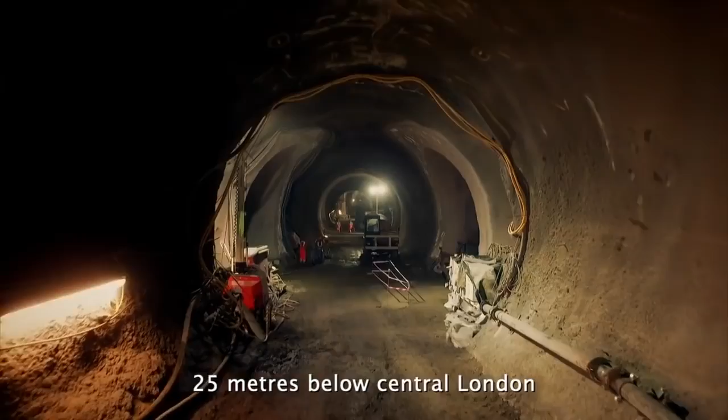This is a mole's eye view of an extraordinary endeavor, almost entirely hidden from sight. While shoppers and city workers pound London's pavements above ground, this secret army of more than 10,000 workers is pulverizing the rock and clay right beneath their feet. They're building Crossrail, a brand new underground railway costing almost £15 billion. It's one of the most ambitious rail projects in Britain since the time of Brunel.

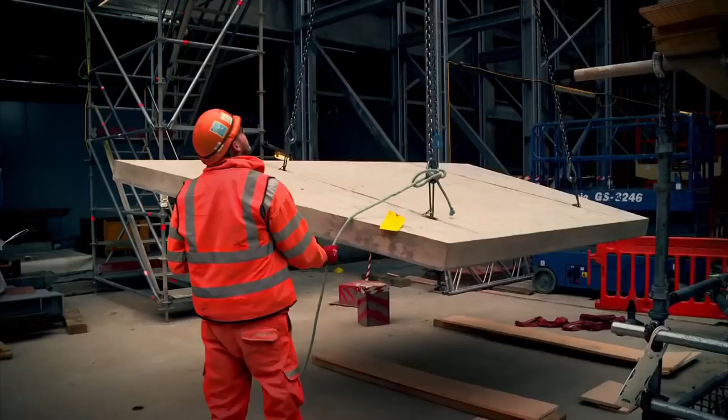You ready? I don't think we've seen anything to the scale and complexity of Crossrail before, certainly not in my lifetime. In the last series, we followed engineers burrowing the maze of subterranean tunnels for the trains to pass through. Inch up nice and easy. You know what? This is real. It's coming. We've been working night and day. And now for the second part of Crossrail. Give us a shout if that's going to touch that handrail. Now we follow workers as they embark on the crucial final phase.

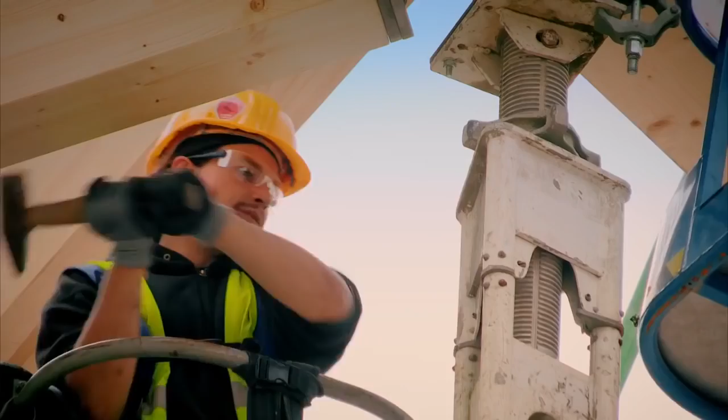Oh, stop there. Engineers face the huge challenge of constructing the tracks, trains, platforms, two notches up again, and stations. Down a little bit so you face me. It's a constant battle to avoid snarling up the streets. This is one of the busiest roads in London. You've got thousands of pedestrians walking past us. Pressure's on. Or causing them to cave in. The wall hasn't collapsed then yet, no? Great big mega project all across London. Every station is feeling the pressure and is feeling the heat.

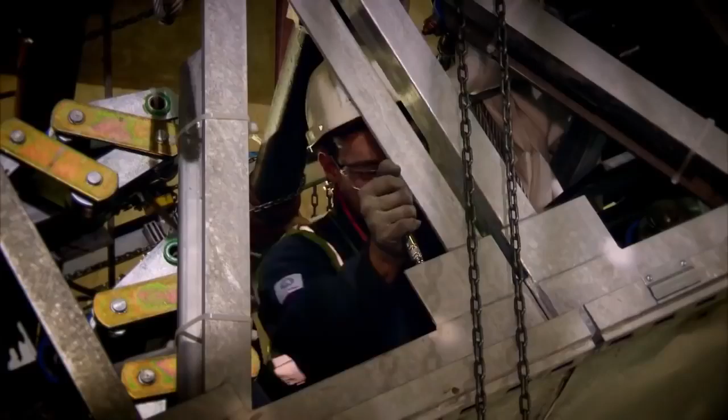For the last 3 years, cameras have been following crews as they struggle to finish construction, so that the first train can depart on time. Tight. They're coming that way, yeah? We've got to be here before 6. Before we open, there's a lot to finish. All our reputations are at stake. We got to get the track in, we got to get the platform, and then we got to get out of the way because the trains are coming through. This is the exclusive inside story of the race to complete London's new underground railway.

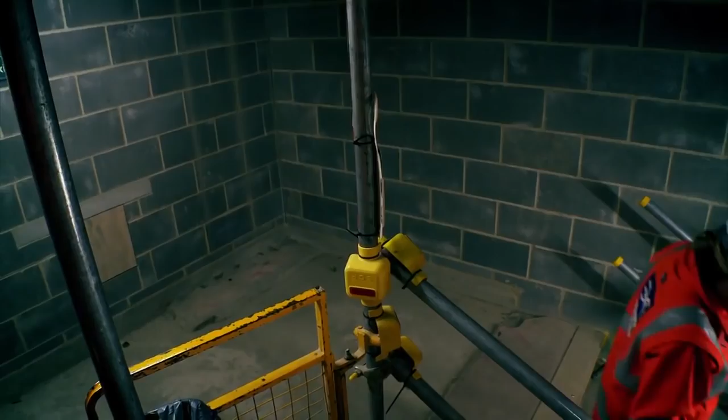5 a.m. Farringdon, the heart of London and a historic hub for trade in the capital. As merchants at Smithfield Market set up their stalls... All right, ready to go. Down, down, down. It's not the 8 levels going down, it's the coming back up. Crossrail project manager Linda Miller is descending 30 meters down into the bowels of the earth. Fantastic. All right, so we're not too far to go. We've got about half an hour.

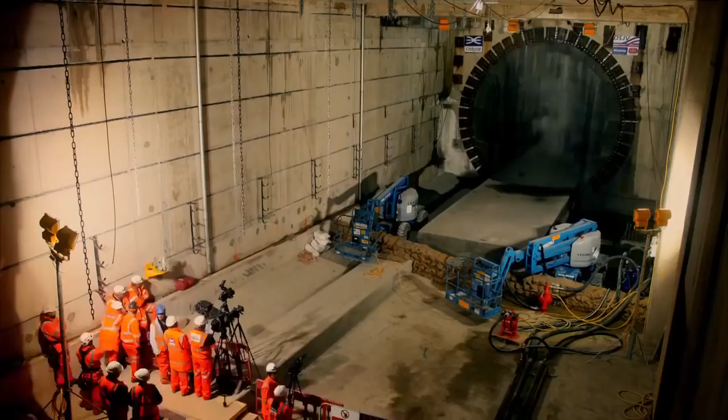Linda is joining workers to witness a critical milestone on the Crossrail project, the 18th and final tunneling breakthrough. This marks a key moment. For the last 3 years, 8 giant drilling machines like this have been excavating the earth to create the tunnels that Crossrail's trains will run through. So there you are, you can see Whitechapel. This final slab of concrete is all that stands in the way of the tunnels connecting up, so they run unimpeded from the east to the west. Yeah, okay. It also marks the start of a new phase in this trailblazing project.

Over the last 3 years, it has not been an easy dance by any stretch of the imagination. This is an incredibly, incredibly important moment in time. But this is also for us the starting gun of turning these great big cavernous concrete spaces into functioning, beautiful transportation systems for the next 120 years. All eyes and ears are on it coming through at the moment, and it's a moment of tension, it's a moment of anticipation. Oh!

With one final push, tunneling on Crossrail is complete. Congratulations. Congratulations. That's fantastic. Welcome to Farringdon. For every millimeter of this, I have been with it. I got the story for each one of them. I'm not exaggerating this, by the way, I'm romantic about it. Fantastic night. Tonight's a night to be celebrated. It's a hard-fought success.

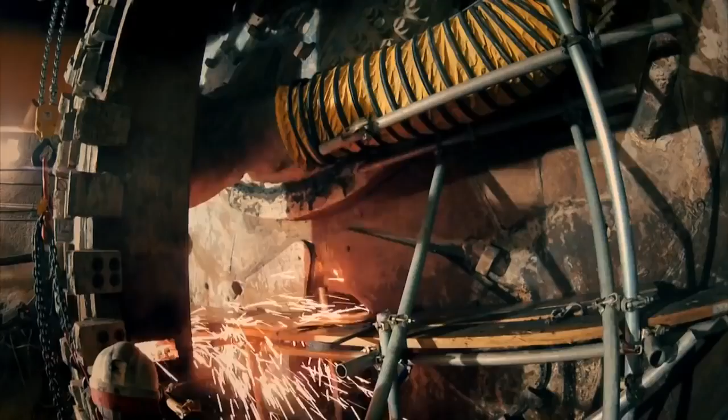As workers carefully dismantle this last tunneling machine, a critical new chapter in this ambitious scheme kicks off. Crossrail is a story of huge, huge moments and giant accomplishments. I've got 100 great big things I got to worry about every day. And going forward in the future, I have 1 million little things to worry about every day. Now it's a race to the finish line.

Crossrail is a brand new east-west railway being built directly below the heart of London. This new line is designed to ease the strain on the existing 150-year-old London Underground network that today struggles to cope with peak demand. Crossrail is a huge new railway for London, so it's going to be able to carry 200 million passengers a year, a 10% increase in capacity. At a stroke, Crossrail will help to keep London moving for the next many, many years.

The new line will run overground from Reading and Heathrow in the west, straight underneath central London. It will plug directly into key mainline train stations, connecting the bustling West End to the historic Square Mile and the thriving East End, before terminating at Abbey Wood and Shenfield in Essex.

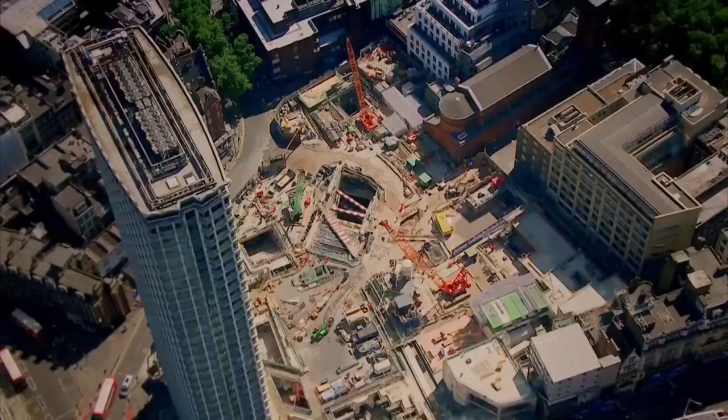120 kilometres of new railway will link to the rest of the tube. Heathrow Airport will be just 26 minutes from London's main shopping district, Oxford Street, a journey that currently takes almost an hour on the tube. It's one of the biggest engineering projects in Europe.

A big construction project is a little bit like an orchestra. You've got many players, lots of skills, different skills, and they've all got to be playing to the same tune. The complexity that goes along with scale is, of course, intense. Railways are very difficult things to design and build.

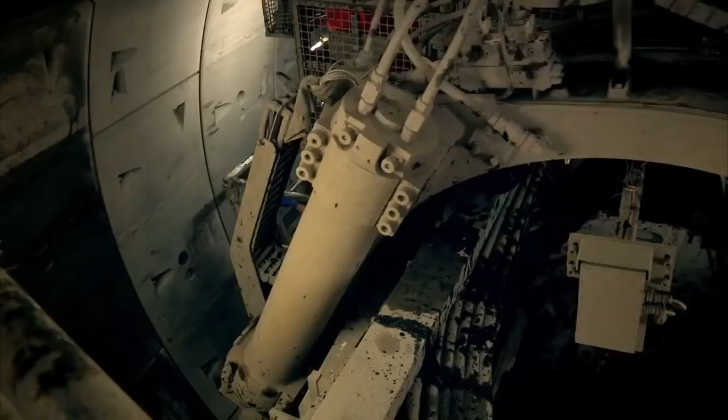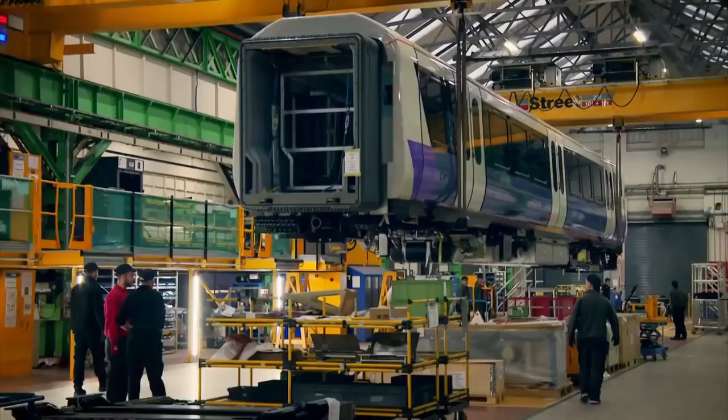Construction work on Crossrail began in 2009. The first major challenge facing engineers was to dig out 42 kilometres of train tunnels underneath central London. Now, with tunnelling complete, they face the Herculean feat of fitting out the platforms, laying the tracks, building a fleet of new trains, and constructing 10 cavernous new stations in central London. And hold it there, stop. With the first train scheduled to run in less than 3 years, the clock is ticking.

The biggest station that needs building along the line will be at Farringdon. Farringdon is home to Smithfield Market, the largest meat market in the country, and the city's world-famous diamond crafting quarter, Hatton Garden. Once complete, Farringdon will become one of Britain's busiest train stations, servicing 150,000 passengers a day.

Thank you. Oh, there you are. Every day I bounce out of bed ready to come here and come to work, feeling great about it. Linda Miller faces the mammoth task of making sure its gates open on time. This station is really going to be where the action starts when the railway opens. If you were to take the Shard, which is the tallest skyscraper in Europe right now, and lay it on its side, it would fit inside of my Farringdon station.

We're enormous in scale. Our platforms are over 300 meters long. What that means in the future, if you're stepping off the trains at Farringdon, you need to know which way you're going, because if you walk in the wrong direction, you're going to be half a kilometer from where you wished you were.

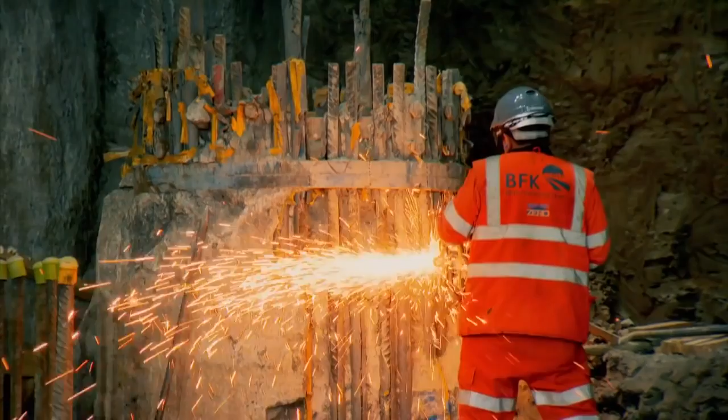Looks great. Afternoon, guys. We get every day that we're spending the taxpayers' money, and we care about that because we're part of those people paying for this. Linda's team's first task is to dig out 2 huge 8-story deep holes. These will form the ticket halls for Farringdon Station. Underground, they must widen the freshly dug tunnels to create its platforms, then dig out passageways and escalator shafts to link them to the ticket halls and entrances.

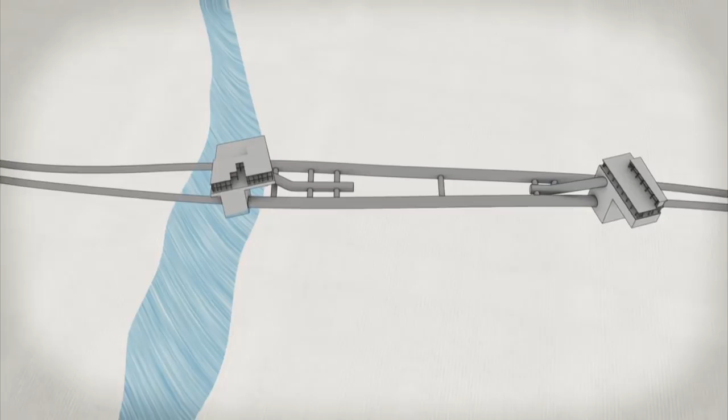Excavating the earth to build the platforms could be treacherous. Geological fault lines run right across the site, and an ancient river once flowed through here, leaving the earth pitted with unstable pockets of sand and water. If the team hit these areas as they dig, the earth could cave in around them, so they must be on guard. While workers above ground dig out the huge holes in which they will build the station's ticket halls, 30 meters beneath the site, the sandy earth is making excavating the train platforms tough going.

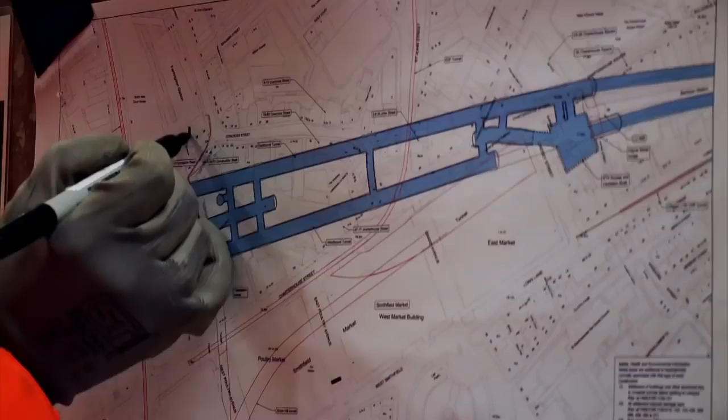So this is what we've got. Here's a bird's eye view looking down on the station. We're facing the most dangerous type of soil. There's not 1, but 3 different fault lines right through the middle of our work. Fault lines present a danger to the long-term durability of the railroad itself. The soil changes, slips, quite literally, 3 to 5 meters. It provides a pathway where you could have cracks, where you could have future flooding.

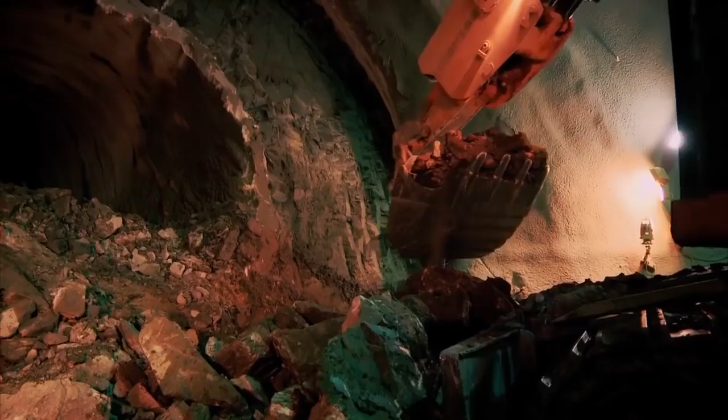The mining is going well, but we're never complacent. We never say, oh yeah, we're all that good, because that's the day it goes wrong.

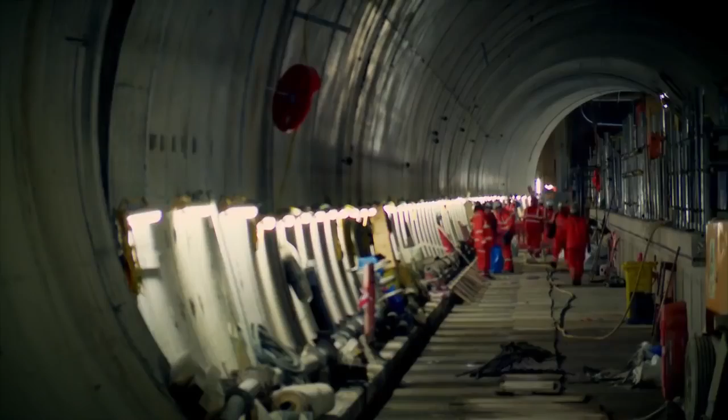Once dry, they line the platform walls with a plastic membrane. The membrane is fully waterproof, tough, durable, and it's going to form a seal around our entire tunnel. We are going to be wrapped like a Christmas present. It takes 5.5 football pitches worth of the membrane to protect the platform and escalator passages that lead up to the ticket halls.

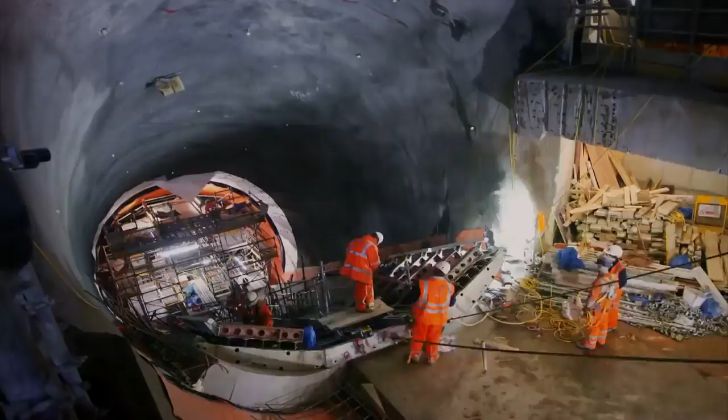See, doesn't that look so astonishing? For a while, it's going to be Orange World around here.

Two stops east lies the vibrant community of Whitechapel, home to the foundry that cast the Big Ben bell, and famous for its bustling market, which has been the heart of the community for more than 300 years. One of Crossrail's 10 central London stations will sit in this district.

The station here won't be completely new. Instead, engineers are undertaking a £111 million overhaul of Whitechapel's existing tube station, built in 1876. Their aim is to create a modern, open-plan station to plug Crossrail trains directly into the existing tube and overground services that stop here.

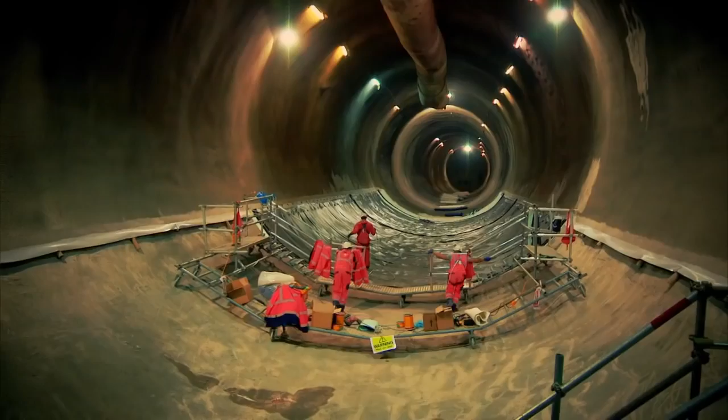While workers complete Whitechapel's train platforms below ground, (Got that out, mate.) proud Yorkshireman Jim Forrest leads the team gearing up to build the new station above. It will be one of Jim's toughest jobs in a career of trailblazing projects.

I've worked in construction since 1960. I've worked on the Humber Bridge, I worked on 1,000-foot concrete chimneys, nuclear power stations, coal power stations, you name it. But this is the highlight, what I'm doing now. I did retire in 2003 for a fortnight and then came back. When I realised it wasn't a holiday I was on, I thought, well, I'd better look for something to do. Depends what comes up, but it would be a good project for a swan song, really.

Whitechapel is one of the most confined and most complex construction sites along the entire Crossrail line. Market stalls, roads, and residential buildings hem the site in. Whitechapel is one of the most logistically complex projects I've ever worked on. We've got very little space to work above and around a live station. We've got schools and public and sports centres.

I think the station layout is not very good for modern day. The passenger flow is very poor. There's no step-free access, and it looks as though it's just been thrown together. What we've got now is not fit for purpose, so we've got to change it. The layout of the existing Whitechapel station is so haphazard that it's the only place where London Underground tube trains pass right over the mainline overground trains.

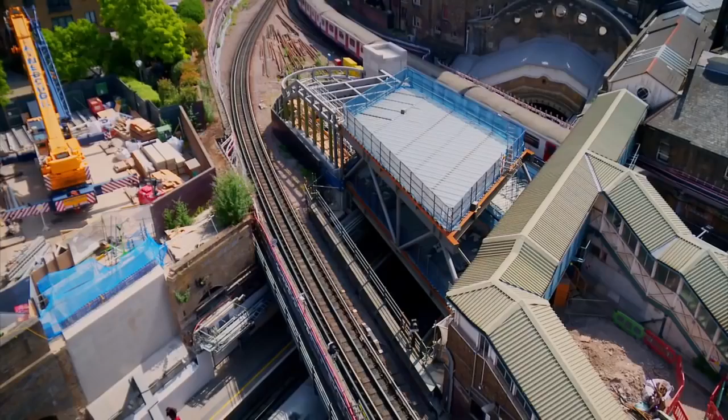Squeezing a conventional station into such a chaotic space is impossible. So engineers must build the new ticket hall inside a unique 180-metre-long floating bridge that passes right over the site. This station bridge will run north to south, connecting down to the Crossrail tunnels, channeling passengers to existing train lines.

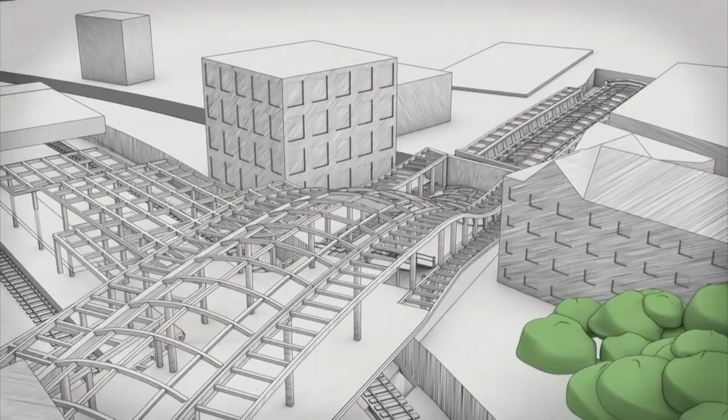A skeleton of 6,500 pieces of steel will form its frame. This will allow the station bridge to hang from the surrounding Victorian infrastructure, giving the impression that it floats above Whitechapel. 352 panes of glass will allow light to stream through the structure. Special aluminium roof cladding will absorb train noise, while carbon-cleaning sedum plants will top out the elevated concourse, giving this 19th century station a 21st century makeover.

If I was given a choice, I would maybe say yes, we should flatten this and build a nice one, but then it wouldn't fit, it'd be like a carbuncle in amongst the rest of it. So you've got to be respectful of what other people want. Keeping the existing station operational while they build the new one above it makes this project even more difficult for Jim and unpopular with commuters.

Whitechapel is open, but this particular entrance is going to be out of service until about 2018 while it's being refurbished, Crossrail's being introduced. You've got to go about half a mile to get from the platform to the hospital, which is not very good if you're late. There is now a new pedestrian crossing right opposite the exit to the station though, so you just carry on. It's the same distance.

No, I've been hit by the station closure this morning. Had to go from one station to another and didn't really know my way there. There's always work going on, and it's not just here, but it's all over London.

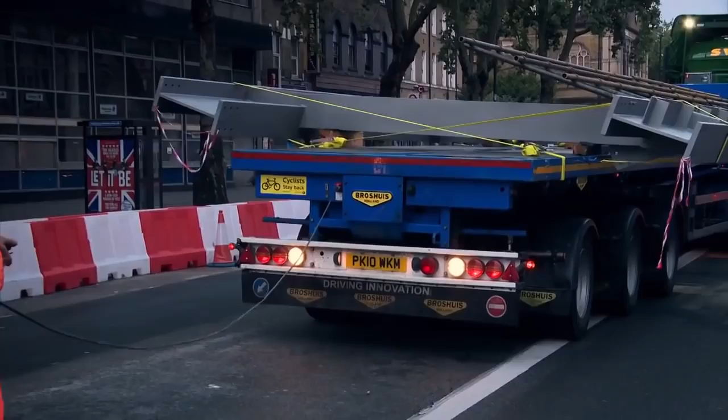There's traffic marshals going down to block the traffic down that end. We've also got traffic marshals down that end to stop the traffic there. These lads are controlling the rear axle steering, so it helps them get around a very tight radius. You can see how much there is, at least a metre hanging over either side.

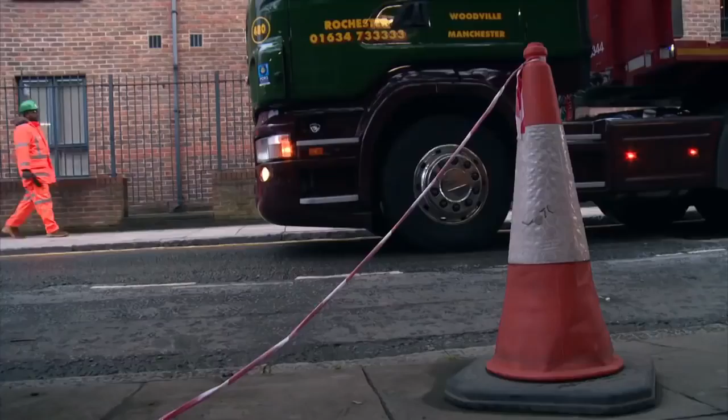Here we don't have a lot of clearance on the street furniture. The loads look big. The shape of them makes life difficult for them. Here we are. The road is now open, and it's open with 7 minutes to spare. Now we need to take this down to the crane to allow the other 3 lorries to drop back to make sure that the front lorry isn't blocking the pedestrian way when the market opens.

With 6,500 pieces of steel to guide in and assemble over the next few months, Jim's team has their work cut out. Another one bites the dust, eh? Yeah.

The markets here are at the heart of community life. But some traders have been forced to move their pitch while Whitechapel Station is rebuilt. My shop was in front of that station, so customers basically used to come in the street, but now it's a little bit further. But it's only for 2 years, so after 2 years more customers will come because of the Crossrail and other stuff, so it should be better.

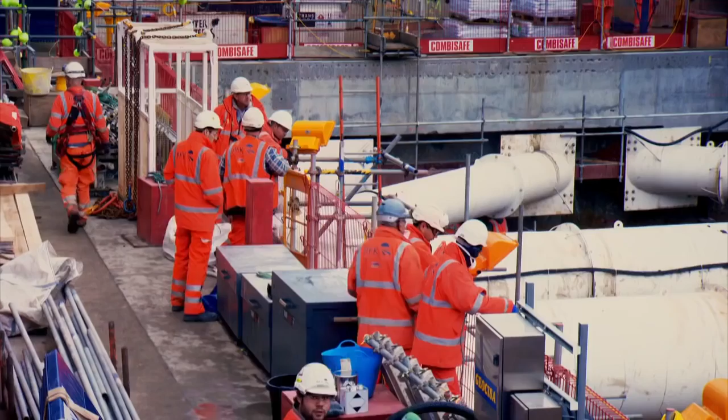Two stops west, Linda's 500-strong team has run into problems building the new station at Farringdon. The track teams, they're like a juggernaut, so we got to get out of the way. This is one of the busiest sites in the entire project, and in fact, the busiest I've ever been on in my career. But there's a new problem to solve, and this is a really tough one.

The team has dug out the 8-storey deep holes that will form the ticket halls for the station, and are now building its walls and floors. We had 3 pieces arrive on site on Friday that we couldn't get in over the weekend. That is going to be the hardest of them all. Underground, there's a battle for space. As the walls of the platforms close in, it's become almost impossible to shuttle crucial materials and equipment down to this crammed subterranean site. This jam could hold up the track-laying team that is fast approaching this stop.

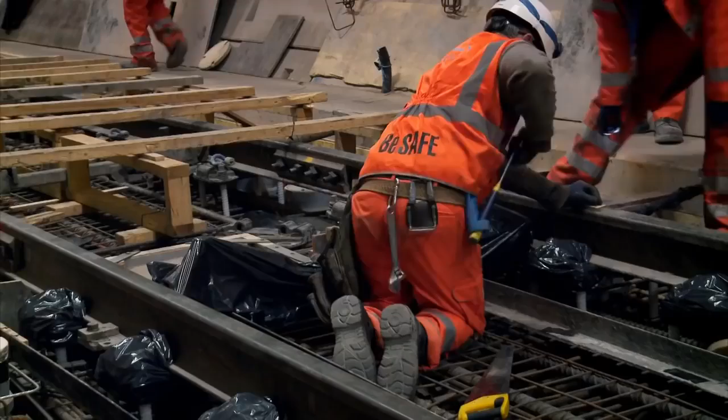Right on the tail of our tunnelling operations, the track laying has begun out in East London and is heading towards us. So the track layers need safe, clear access from street level down into the tunnels that is not through the stations. We lower the unit down into these first 2 beams, and then you just remove the jack. One thing about being an engineer, especially in the construction industry, is you're always having to think on your feet.

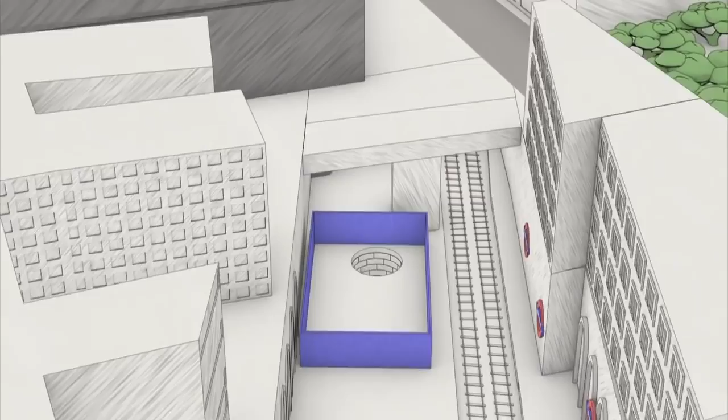To get equipment down underground faster, Linda's team hatches a plan to dig out an emergency 30-metre deep vertical shaft. This will plug into the tunnels below to give workers direct access. Building this shaft won't be easy. Above ground, the site is crowded. The only available space to dig down is on the neighbouring tube line platform at Barbican Station. The shaft will sit less than 2 metres away from live tube tracks.

The team digging it must remain focused, or they could miss their target, or delay the tube trains that need to pass through this station. Sometimes you need a plan B, sometimes a plan C, a plan D, and E until you get it right and get what you need. The pressure is on Steve Parker to construct the shaft fast.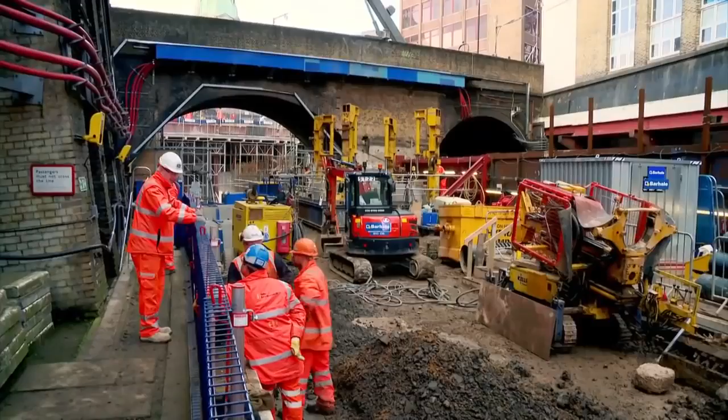We're currently working 24/7 at Farringdon. The pressure's always on to get the job completed, and it's a big motivator. Ideally, you'd be building this sort of shaft in the middle of a green field, impacting no one. It's a 5-metre diameter shaft. It's sunk by, basically, there's a steel cutting edge on the bottom ring, and once we've got enough muck excavated, we basically can shove the ring down.

Steve's team must excavate more than 1,000 tons of clay to create the shaft. As they dig down, they must line its walls with concrete panels. The panels lock together to form a ring that stops the earth caving in.

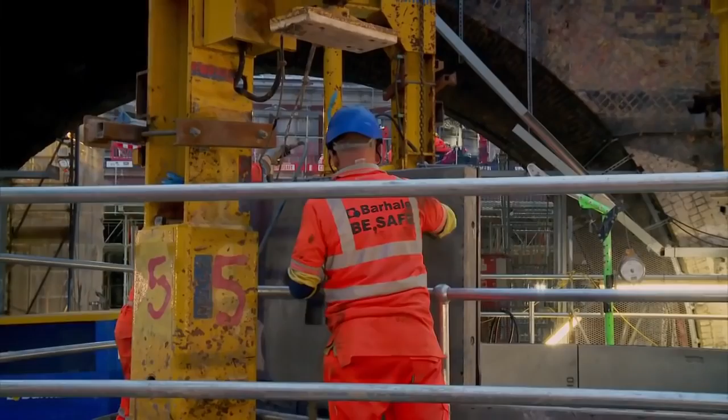Hydraulic jacks thrust the rings down into the ground as they dig deeper. They must work day and night to complete the 30-metre deep shaft, with trains passing right alongside. It doesn't always run super smooth. You're working with quite large sections of concrete. They're quite big, and you lift it in position with a crane. There is a bit of sort of jiggling about that you need to do to get the ring built.

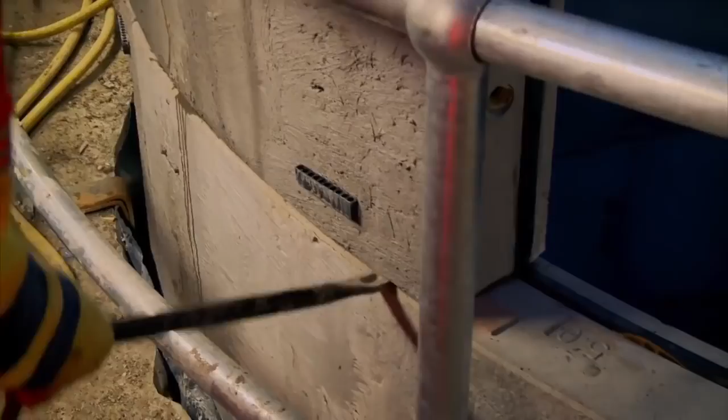They've got to try and keep the shape of the ring, so when they shove it, it goes down plumb and level. So it's very important that you need to keep the diameter right, so they're constantly measuring. After each plate is positioned, they measure to make sure it's at the right dimension.

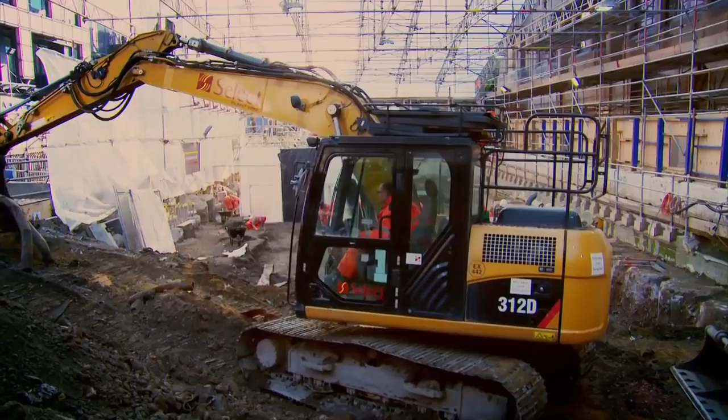In the city's business district, engineers are hard at work building another brand new station for Crossrail trains at Liverpool Street. Digging out the massive 23,500 square metre hole for this particular ticket hall creates a unique portal into the past for Crossrail's lead archaeologist, Jay Carver. You don't really get the opportunity to dig large holes deep into the ground and get that full sequence of London's history that spans back 2,000 years.

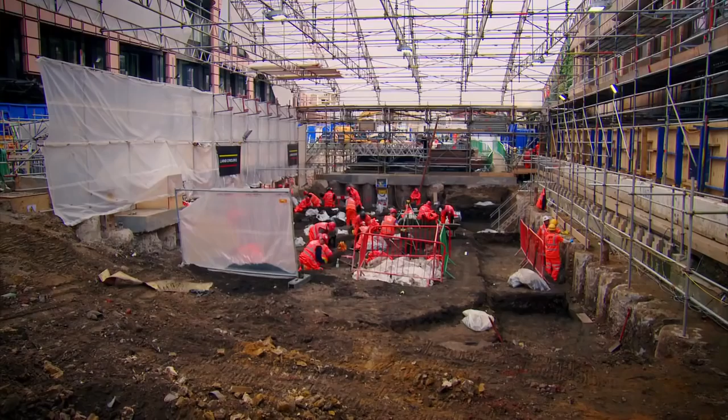Crossrail's been really interesting for archaeologists because of its scale. The route east-west across London has provided this kind of unique slice across the city. Over the past 5 years, Jay's team has unearthed over 10,000 extraordinary finds at more than 40 different sites. From prehistoric bison bones found in West London to 25 skeleton victims of the Black Death found in the East. Every site has a significance, hence why we're carefully revealing what remains and recording it before it's gone.

Crossrail station at Liverpool Street will be the deepest along the line. We've got as many names for mud as Eskimos have names for snow. And the deeper they dig, the further back in time Jay's team can investigate the city's history. We're actually standing in the excavation for the new ticket hall at Liverpool Street for Crossrail, and we're looking for a feature, and that's a Roman road.

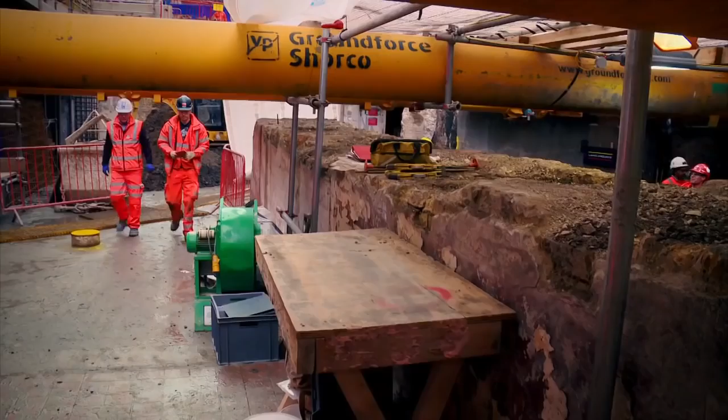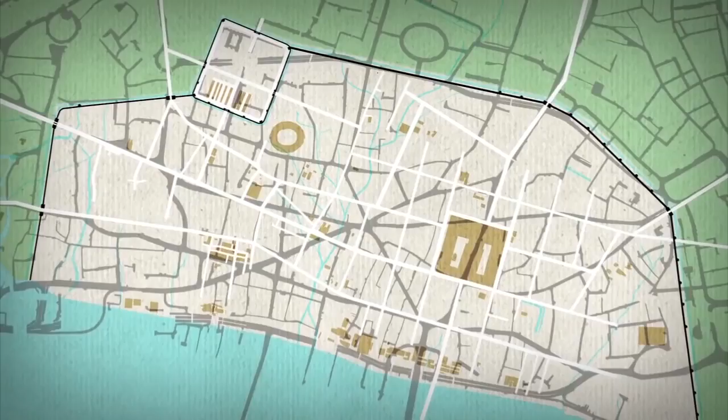So Rob, let's take a look at this map that you've got. A road has been postulated outside the city walls for a number of years. A part of it was found in Eldon Street, which is one block over that way, during the 90s. The Roman city of London, Londinium, was founded nearly 2,000 years ago. Its 2-mile-long defensive wall protected a complex network of roads. Many of these formed the basis of London's modern streets. At its peak, Londinium was home to 60,000 citizens, making this small settlement tough to travel across without delays.

Jay and his team are hunting for evidence of a Roman North Circular road that, like Crossrail, ran east to west around the walled city, cutting travel time through early London. We know a lot about the central and western areas of the city, don't we? But this is a really great opportunity to really try and understand this part of the Roman city and what's going on outside the city wall. 60 archaeologists are working around the clock to excavate this huge pit. But no one knows for sure if they will find the lost Roman highway.

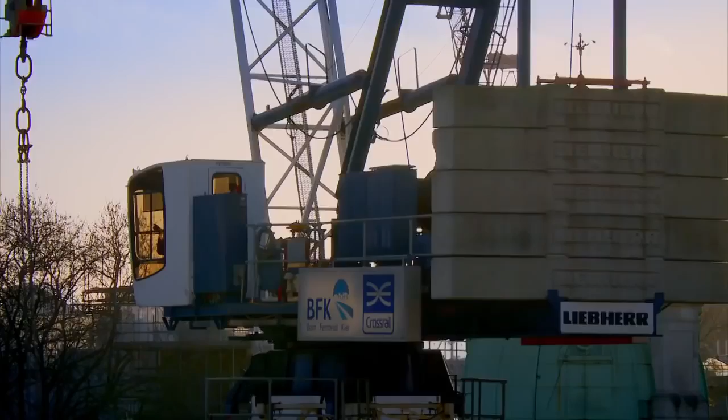One stop west at Farringdon, it's taken Linda and Steve's team 8 weeks to excavate the emergency shaft beneath Barbican Station, giving access to the tunnels below. Now the shaft is built, the materials are moving. They're able to move as fast as they can, 24 hours round the clock, doing what they need to do to pick up the speed to deliver their part of the job. With 15 months to go until Crossrail trains start to run, workers race to shuttle the vital materials they need underground to complete the platforms and lay the rails.

Greg Purcell is responsible for installing this section of the railway under Farringdon. It's not often you get to work on a project of this magnitude. It's maybe a once-in-a-generation thing. It's amongst the most logistically complicated programs of work I've ever been on in my career. If one part of the production line fails, the whole production line fails.

Greg's team need ingenious machinery to help them lay 50 kilometers of track in time for the trains to roll. Track installation in the modern era is a completely different animal than it was maybe 100 years ago. In 1863, track-laying gangs of up to 25 men completed work on London's very first underground tube, the Metropolitan line.

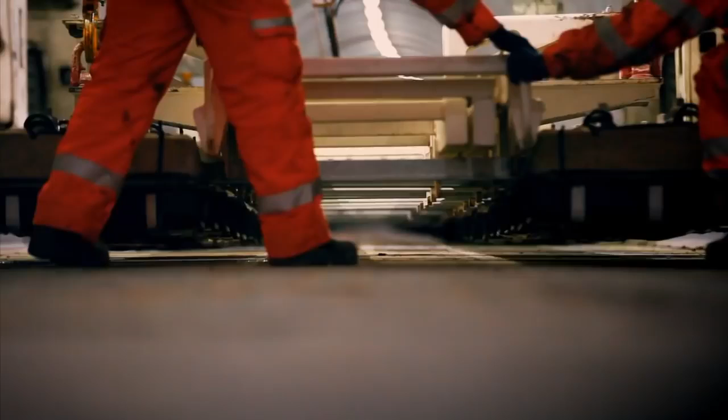Working in shifts, they could lay up to 150 meters of sleepers and rail in a day. Today, these machines can lay over 4 times that. On Crossrail, we've got a fleet of high-tech vehicles. We've got a 465-metre-long concreting train. We have a multi-purpose vehicle to work in tunnels.

This machine is called the multi-purpose gantry. There's 4 of these on Crossrail, and they're worth about £1 million each. Looks like a transformer, and it can change its shape depending on what condition it's working in, whether it's lifting rails, lifting bits of reinforcement. The whole machine can take 15 tons in load. This mechanical monster can lay up to 600 meters of sleepers a day.

Multi-purpose gantries are a godsend, and I would struggle to understand how we build a project like this without that sort of kit. Once the trains start running, these tunnels will become noisy. But right here, Greg faces a challenge like no other. He needs this section of the tracks to make almost no sound at all. Here, we are directly beneath the Barbican. Right directly beneath.

Opened in 1982, the Barbican Centre is a hub for arts and culture. The centre's most prestigious performance space, Concert Hall 1, sits 2 stories below ground. The Barbican Centre is the home of the London Symphony Orchestra. It presents regular seasons from the Royal Shakespeare Company. It really is one of the truly great artistic centres in the UK.

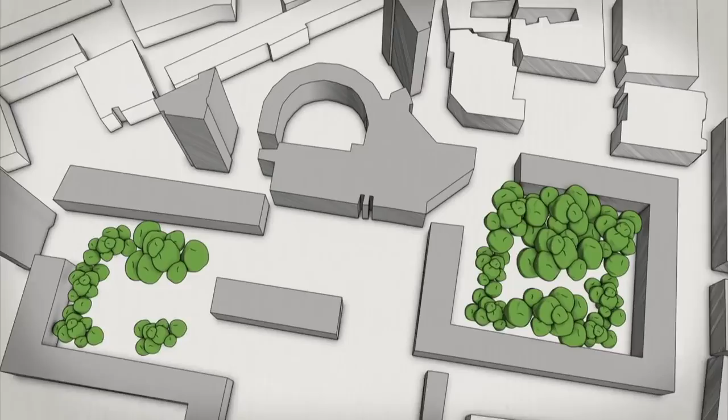A lot of music was about exploring the relationship between the very quietest sounds and silence. And therefore, a lot of performances really focus on that magical area of audibility. And there's the rub. The Barbican's Concert Hall 1 sits just 17 meters above Crossrail's tunnels. Noise or vibrations from trains could travel through the earth and into the concert hall, disturbing performances.

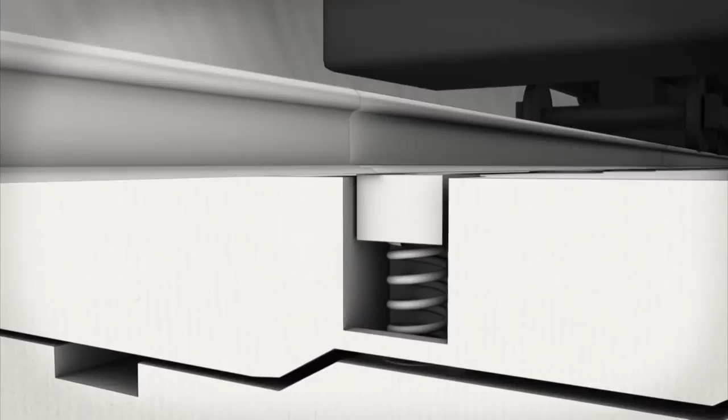To guard against this, Crossrail engineers have developed ingenious floating tracks, unique concrete slabs of rail and sleepers that sit on special springs. When a train passes over these springs, they should absorb all of the energy and noise before it reaches the concert hall. Floating track slab allows that noise to be brought down even lower. But on the surface, you won't hear anything when you're watching Hamlet.

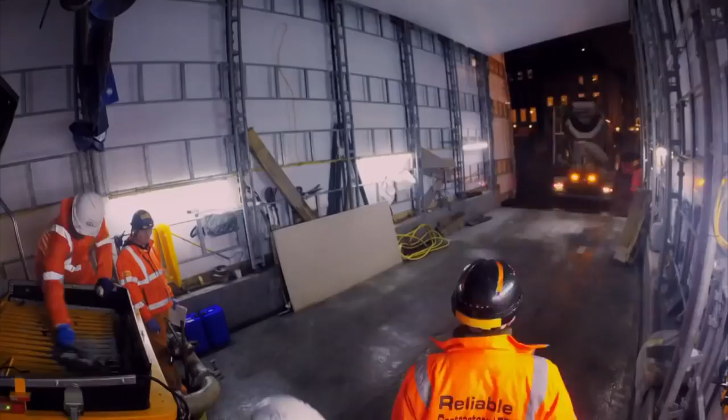It takes over 150 tons of concrete reinforced with steel bars to form each 30-meter-long floating track slab. So what you can see behind you now is all the guys assembling the track. We've got all the reinforcements complete. The spring housings are all installed. We've got all the rail, and this slab is being set up to cast the concrete on top. Ready to go. The concrete that we pour here is called Magnadense.

A very expensive mix of concrete. We pay around £1,000 a cubic metre for it. Traditional concrete costs maybe a tenth of that. The reason it's so expensive is because it's upwards of 40% heavier than normal concrete. That in turn will then result in very, very low to the point of hardly any vibration in a Barbican theatre. We treat it a little bit like gold on the project, so we had to keep the waste concrete to an absolute bare minimum.

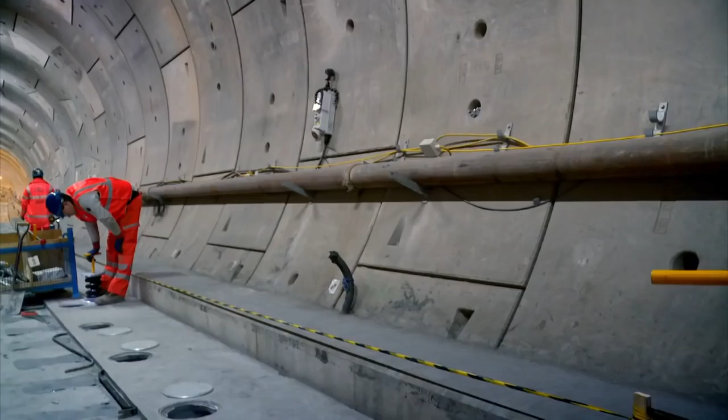Are we there, Stu? There we go. That's the liquid gold coming out there. They flush foam balls down the pipe to eke out every last drop of Magnadense. Very impressive.

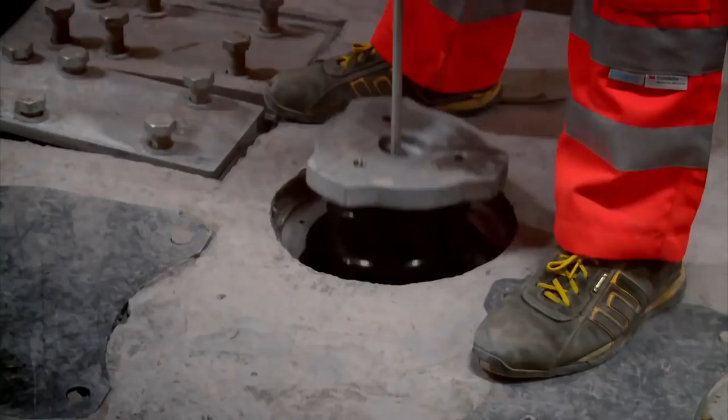Once set, they screw the springs into place on the underside of the slab and raise it to its final height. So this is a section of the floating track slab that we cast. We're going to be putting the springs in there, and we will then jack up the slab. When you're in a Barbican theatre watching whatever show you're watching, you won't hear a thing.

With the slabs cushioned by the springs, they can set the rails on top. But they'll only know for sure if their silent track system works when the trains start to roll. With this crucial section of the railway in place, the team can pick up the pace through the rest of the tunnels.

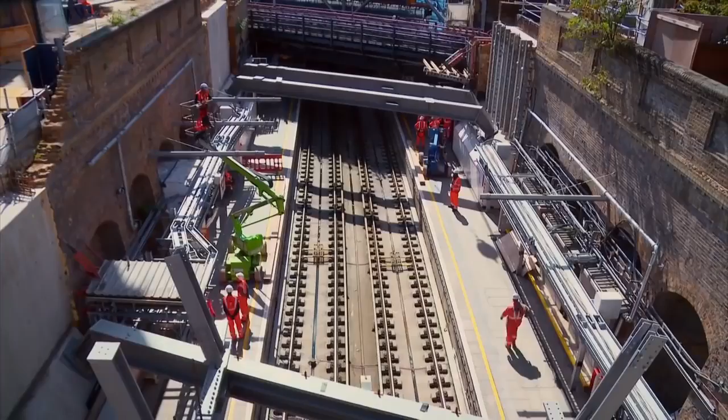2 stops east, in Whitechapel, Jim's team is fitting together the huge pieces of steel that will form the area's new floating bridge station. Can we make sure them flanges don't bite into the tarmac?

Space here is so tight that they have no option but to assemble the bridge sections in a neighbouring school. Yeah, that's enough on that one. Luckily, school's out today. It's Sunday. These elements are all fastened together by hand. This is probably similar to putting together a flat pack wardrobe, and you just hope that at the end of the day you haven't got 2 or 3 nuts and bolts left.

Move round to your left for me as you're going. We're putting the big pieces of steel together. Once they're together, they will both be lifted simultaneously over onto the railway. We connect big blocks to big blocks and make a mega block. Once assembled, Jim's team must use cranes to swing each section into position over Whitechapel's mainline train tracks. The line is closed for today's operation, but must reopen in less than 48 hours, ready for Monday morning's rush hour.

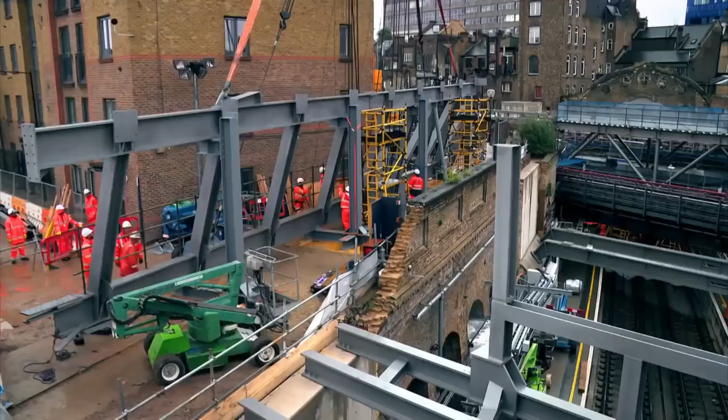He needs everything to run like clockwork to avoid chaos. Yeah, come down on that one. The first big section of bridge is ready to lift. But there's a problem. Bad weather threatens to shut down the entire operation and could delay the project. To your left for me as you're going. We're taking our time. This is a difficult operation to carry out because the alignment has got to be precise.

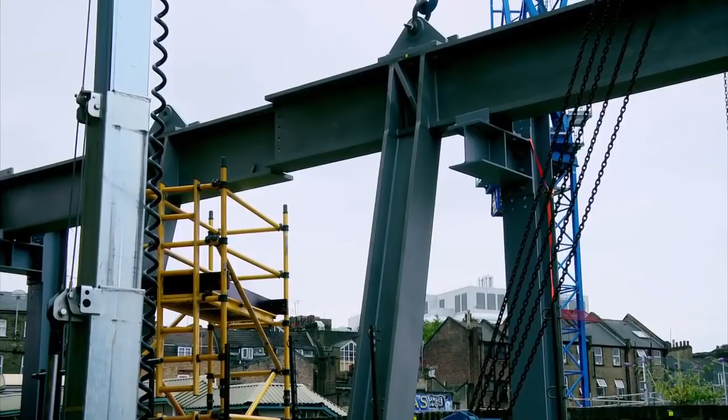One of our main concerns is monitoring the wind. It does make the loads unstable. We obviously have to keep an eye on it all the time. Tall buildings hem this site in. They channel the wind into a strong tunnel of air. If the wind gets up during the big lift, there's a risk it could blow the bridge sections off course into the residential buildings next door.

I can hear the tension coming into the slings and shackles now. The load is now being lifted. See the steady movement with the crane lifting it up. It takes great skill to carefully maneuver this 40-ton chunk of steel away from the buildings and down towards the railway tracks. Jimmy down, another little flick to your left for me. Right, that's nice like that.

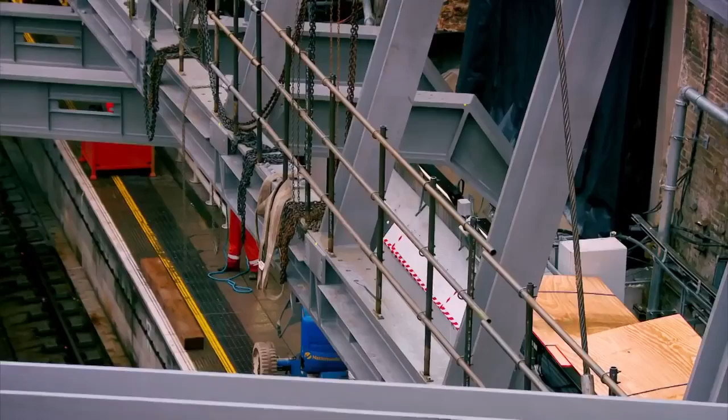So far, so good. The section must slot into this 25-metre-long gap that stretches between this handrail and this crossbeam. It's going to be tight. Go to your left a bit more, mate. You let me coming down, that's your way. All stop there for me a minute. All stop there. Just as they near the drop zone, they hit another glitch. Do it the handrail. What you need to do, take a foot out of it.

Okay, such a tight fit with the handrails, but to get the unit in, they've got to cut a small gap in the handrail. They must act fast. A hold-up here could stop trains running tomorrow and result in Crossrail bosses being fined over £100,000. If they cut the top one off, they may well have to cut the second one off.

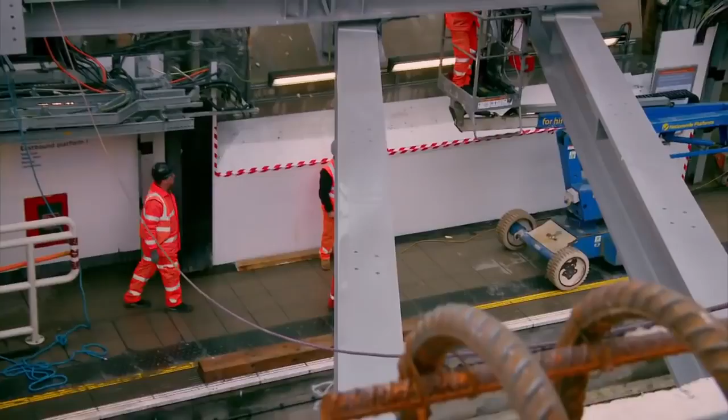You ready with your podger, mate, yeah? You put your podger in? Yep. Right, how's that looking on that handrail now? That looks pretty sweet. Right, are we happy to come down, yeah? I'm ready. You ready, Adam? You all right? You ready? Yeah, start bringing it down slowly then. Okay, Dave, nice and steady, mate. A few inches to go. Lower off. Give us a shout if that's going to touch that handrail. Just keep lowering, Dave.

I would say you might need to get a bolt in, mate, because that one's now slightly out of line now. All right, Dave, inch to go. That's us in. You're looking at a very happy chappy. It's gone really well, that. But with more than 6,000 pieces of bridge yet to assemble, there's still a huge amount of work for Jim's team to do.

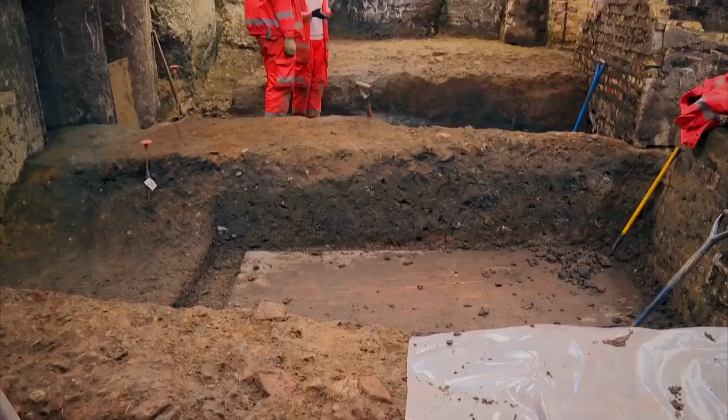One stop west at Liverpool Street. Jay Carver's team of archaeologists have hit pay dirt. It's quite extraordinary, really. We're several metres down from the Liverpool Street pavement. Right below here we have the surface of a Roman road that would have seen the feet, the hooves, the wheels of Roman carts and traffic.

What we've found so far is it's actually a really well-constructed road, perhaps 7 or 8 metres wide in its early phases, and then expanded to about 11 metres wide. Now that's quite a major highway. This Roman highway, wider than a dual carriageway, would have helped people take a shortcut across the busy city, just like Crossrail's train line today.

The road is literally heading kind of diagonally across our site like that, generally east-west. It's quite likely this road is part of a network of external roads around the city of Londinium. Possibly we're talking here about a ring road. It's absolutely chocker full of debris and rubble, no doubt brought in from other places in the city. We can see lots of Roman tile, lots of pottery, lots of animal bone. The occasional human bone as well has been incorporated into this cemented surface.

It takes us back to a time 2,000 years ago when transport was just as important to people living in London. And a road like this probably did reduce congestion in the city itself. The digging will soon be over here, but Jay's work won't be done. His team will analyse all of the discoveries made at Crossrail sites in more detail to slowly piece together the secrets of London's lost past. In Farringdon.

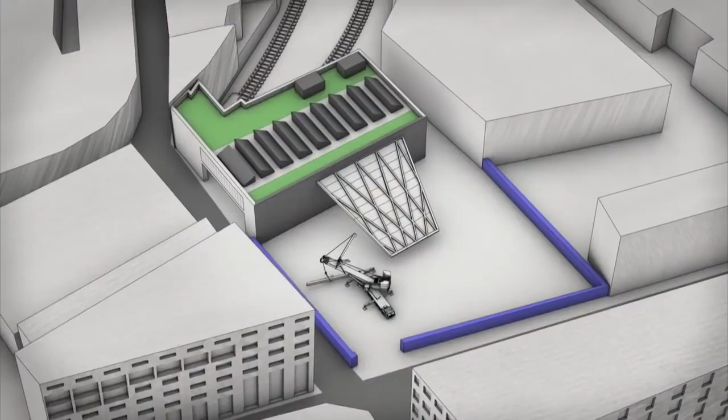In the future, you will come into the doors, you'll be able to continue to walk straight to get on the Network Rail trains, or you'll be able to turn and go down into the Crossrail station. Commuters will pass beneath a cavernous diamond-patterned ceiling to enter the station. To build it, Linda's team must piece together 105 bespoke concrete segments. This will be like assembling a giant jigsaw.

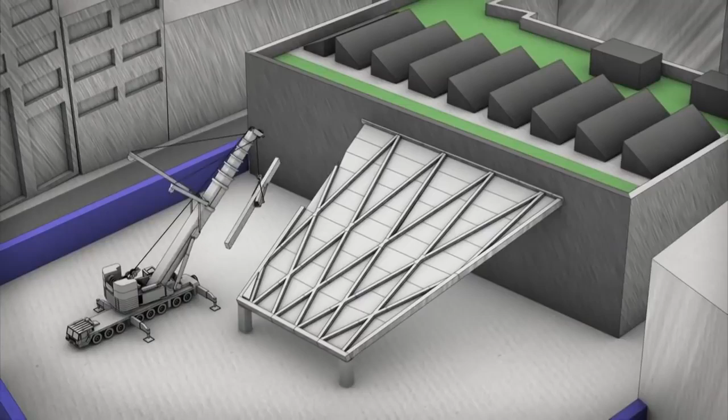42 concrete-coated steel beams will form the diamond-shaped frames. 63 concrete panels will sit inside. Craning these awkward-shaped pieces into position without crashing into the busy Thameslink station next door will test the team's mettle. Plugging into a live railway station has its whole set of new challenges. This is the last big part of the build, and it's going to be tough.

Andy Scholes is working with Linda on this stage of the build. This is our main feature of Farringdon Station. 90% of what we've constructed here on site is buried. It's not just a ceiling, this is a statement piece. This is what everyone will see over the next 120 years when they enter Farringdon Station. The pressure is on in order to get this right first time.

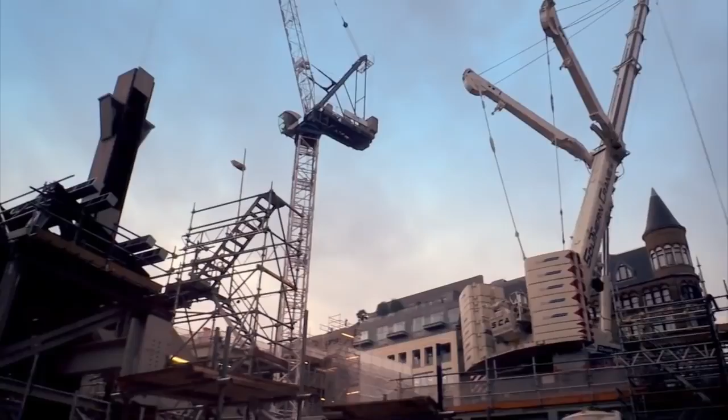First task, erect a network of steel supports to prop up the heavy ceiling as they lock it together. Yeah, it's looking really good at the minute. With the supports in place, Andy's team can start work on the ceiling. It's a diamond shape and it's in keeping with the local area, and it gives a huge visual, striking welcome mat.

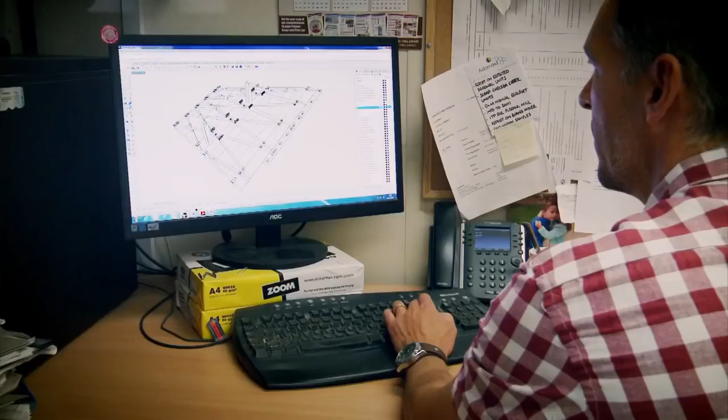The ceiling's diamond design is inspired by the area's history. The nearby Hatton Garden Jewellery Quarter has produced and sold diamonds for over 150 years.

Here's a street which, if it isn't actually paved with gold, is still the richest highway in the world. Since the 1930s, this area of London has been responsible for 90% of the world's diamond distribution. Diamonds, the world's most precious commodity. But then, there's nothing too good for woman, now is there?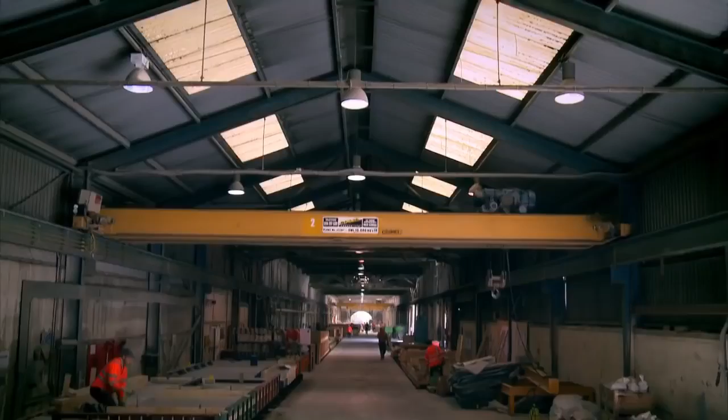Sections of Farringdon Station's diamond-inspired ceiling are being made by hand at this factory in Derbyshire. Each concrete segment is cast in a bespoke mould and takes 2 weeks to create and cure. Once set and polished, workers need to drive each of the 105 pieces 130 miles into central London, where they must fight for space to get onto Andy's crammed site.

This is one of the busiest roads in London. You've got thousands of pedestrians walking past the site, watching and seeing what we're doing. It's quite important that we don't block up the traffic, so we need to keep a through flow of traffic coming past the site. We've now got a delivery coming in. What they're going to do is they're going to hold the traffic and we'll hold the public back to keep them safe.

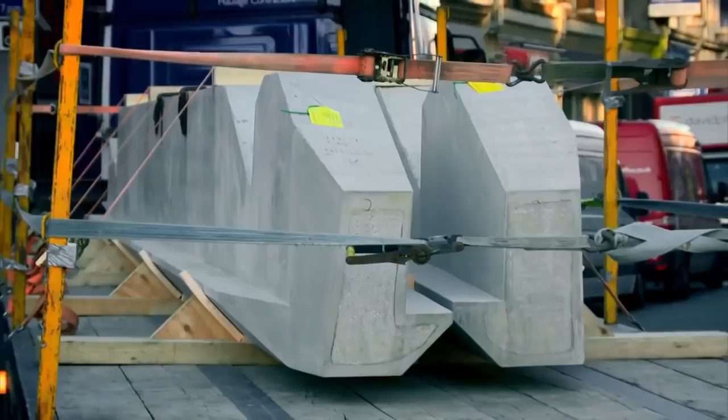The wagon's now on site, and this will allow us to check each individual piece to make sure that they haven't been damaged in transit. We don't want any chips or bashes or any chunks taken out of the beams. Marvellous.

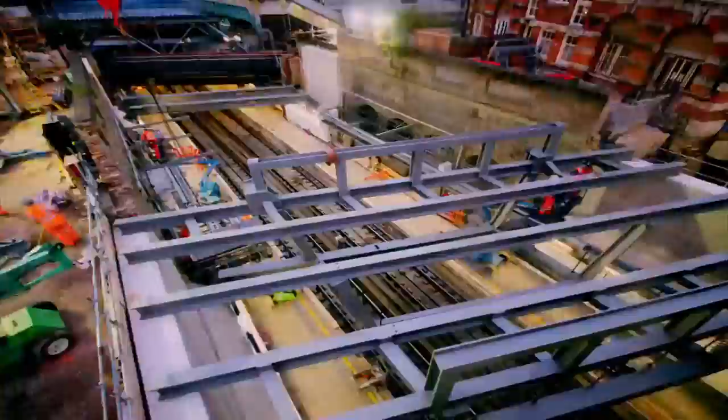In the East End, Jim's team is making headway building Crossrail's floating bridge station across the mainline railway at Whitechapel. This is what we've been building up to for the last year, 18 months. And this is a culmination of a lot of effort. They've had to shut down the tracks for 40 days over a 2-year period to assemble the base of the bridge.

But once down, Jim's crew pick up the pace, erecting its walls, curved canopy roof, and walkways with fewer disruptions to passengers. You've got to very gingerly stack them all in the right order. If you put them in the right order and secure them firmly, you'll get the pyramid made.

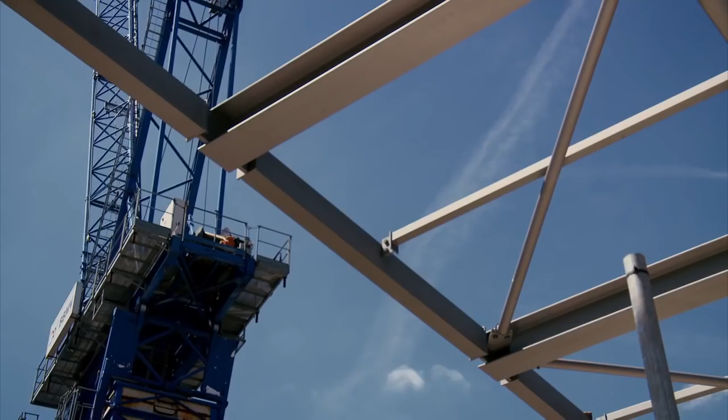Morning, you all right? With 6,500 steel components assembled, the skeleton of the bridge is complete. This is looking quite spectacular now that it's all come into shape. Yeah, it's looking really good. Coming out the ticket hall, it's thinking, wow, didn't know there's so much space in Whitechapel. Must be the most spacious place going, is this now?

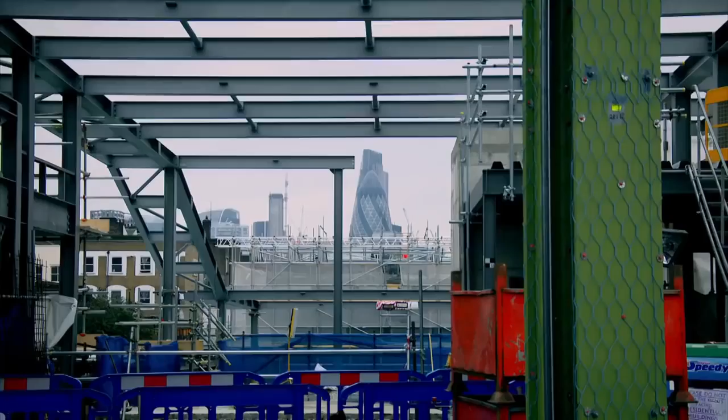This is the concourse area. This area through here is where the passengers will come up from the London Underground lines. It just shows you what is achievable. Took a bit of Yorkshire grit to get to where we are now, yes. Over the next few months, Jim's team will fit out the ticket hall and top out the canopy with its glass panes and sedum plants, completing Whitechapel's upgrade ready for Crossrail trains to stop.

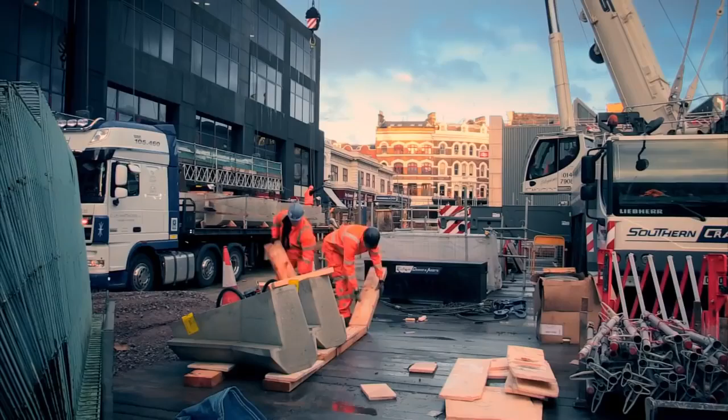Two stops west in Farringdon, Andy's team is gearing up to assemble the diamond-shaped sections of Farringdon Station's vast ceiling. To get all the pieces of this puzzle in the right place, Andy needs to stick to his Bible. What we have here is the plan of the ceiling itself. Each piece is individually named and numbered, so when they arrive on site, we know where we're going to lift them to. If we lose the drawing, then we're stuffed, basically. It'd be a really difficult jigsaw to do.

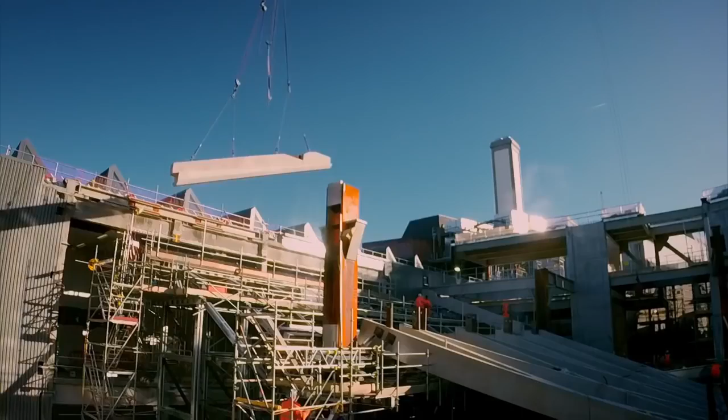Pinch up nice and easy. The beams that make up the diamond-shaped frames weigh up to 10 tons. Lowering them into position, right next to the operational Thameslink station, takes a delicate touch. Keep coming down. This is one of the tricky lifts that we've got to do. That's the ticket hall level. If you listen out, you can probably hear the announcements from the train station. Yeah, very close.

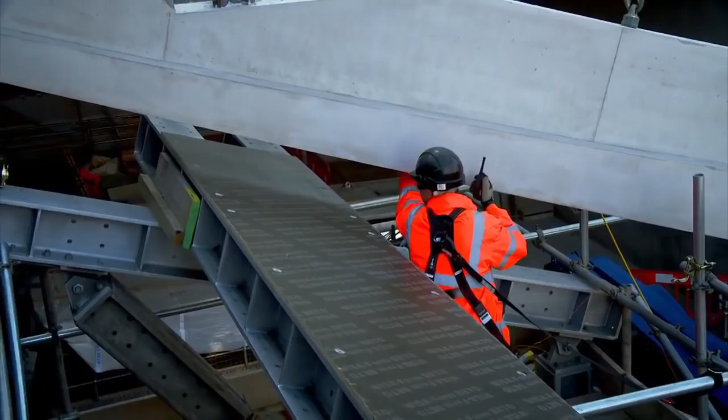We're moving it now millimetre by millimetre to get it into position, because we haven't got a lot to play with next to the Thameslink station. Yeah, down on that. Touchdown. So they've got the beam touched down, but they just need to move it into the exact location. So it's a couple of mil off at the bottom. So they're just working out how best to move it without damaging it. So as you can see, next to the Thameslink station, we're about probably 200 mil off.

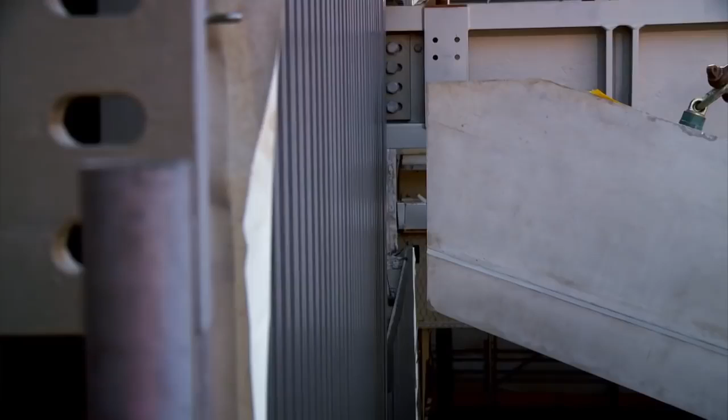They slowly slide the beam into position. With the ceiling's frame in place, they can slot in the diamond-shaped panels. Pinch up nice and easy. So it's just like a big jigsaw puzzle. Luckily, you won't lose any of these pieces under your sofa. That's it, mate. All clear.

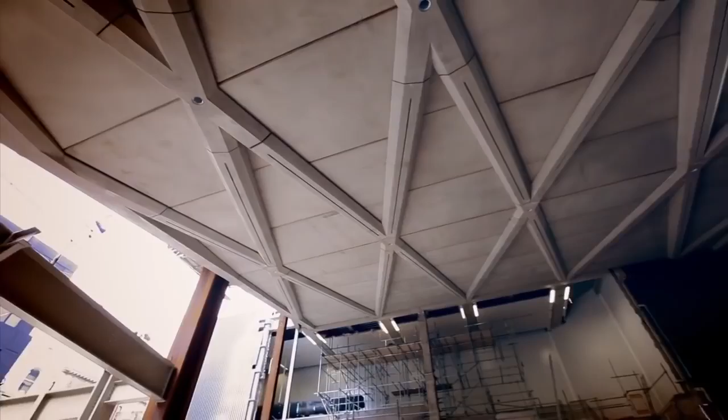Afternoon, friends. Afternoon. After 8 years' work, Farringdon Station is almost complete, and Linda gets her first glimpse of its grand entrance. Wow, wow, wow. That looks fantastic. It's like when you walk into a cathedral. It is a relief to finish the last of the big builds on site. I suppose it's a little sad too, as it is whenever you accomplish something that feels great. Say diamonds are forever, but these diamonds are meant for 120 years at least.

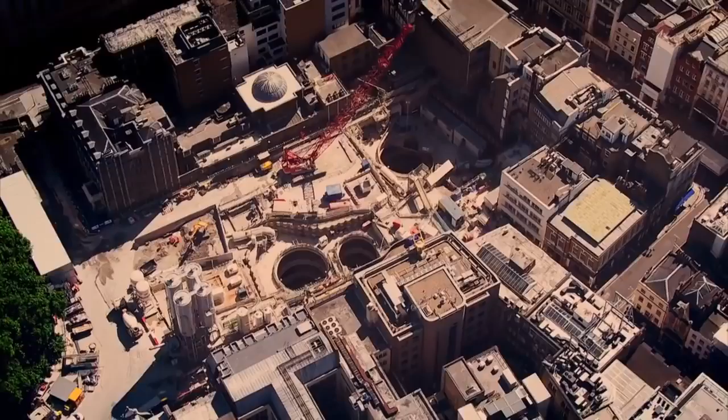With Farringdon's monumental entrance complete, the track team below ground head west towards Oxford Street and Paddington. As they put the finishing touches to the platforms and tunnels, workers at Crossrail's Bond Street station prepare to welcome a very special visitor. I'm down in the eastbound tunnel now at the far end. Just checked the other boxes, everything seems to be okay. Today they're announcing the new name for the railway line and are hoping for a royal seal of approval.

The Queen visiting the project certainly starts to make the whole project seem that much more real. It's just an honour, you know, once in a lifetime opportunity. I did my curtsy, yeah. It's quite surreal to see her actually down in the tunnels, but I feel it's a momentous occasion. I couldn't be happier we're going to be the Elizabeth line. We're seeing that end in sight, and it's created a whole new wave of excitement from the team. With Elizabeth line trains due to start running from this station in less than 18 months' time, the pressure is now on to complete the rest of the railway.

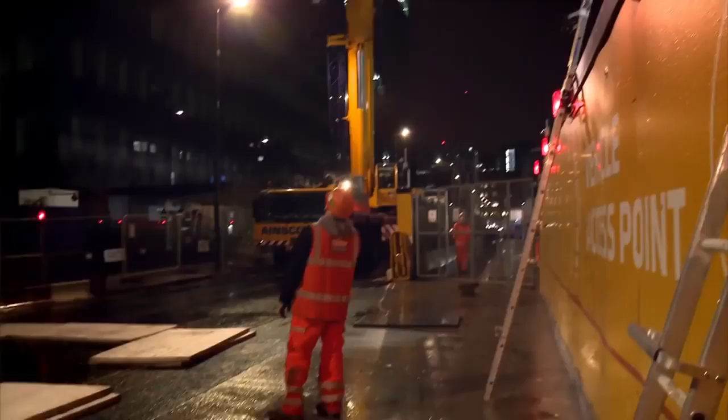Next time, we follow the race to the finishing line. There's no second chances. It gets the nerves going, the adrenaline pumping. Weight's coming on now. As workers battle to remodel Brunel's masterpiece, Paddington Station, time is money here. We have to stay on schedule. And build the rolling stock. God, it's a hell of a challenge. Will they make it so that the first trains depart on time? Oh, not fun. I just want to end now.